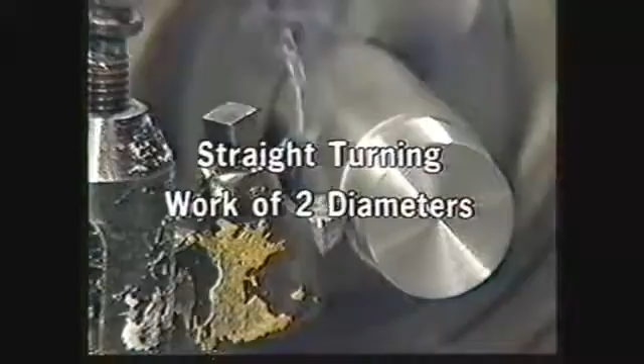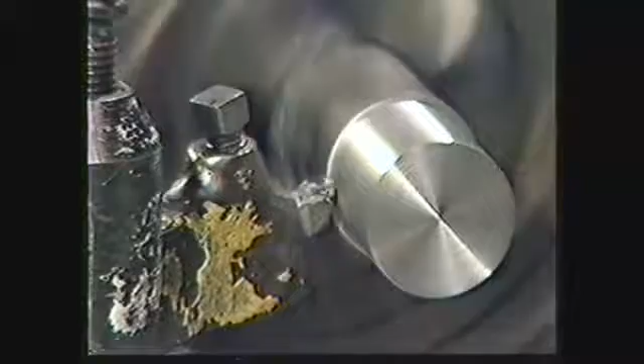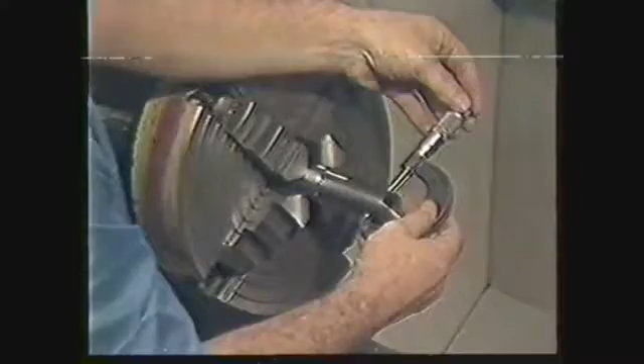This videotape will show you a proper method for turning work of 2 diameters in an independent 4-jaw lathe chuck. This is a completed workpiece turned to 2 diameters. Turning work is a basic skill that you will have to learn because every job done in a lathe must be turned to a given diameter. To complete this task, you will rough and finish turn 2 diameters on one workpiece.

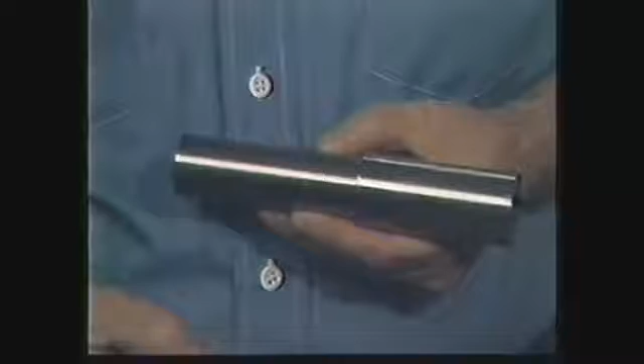Let's review the safety procedure for the engine lathe. You must wear safety glasses. Remove rings, watches, and jewelry. Roll your sleeves up to your elbows. Your clothing should fit tightly enough to prevent it from catching in the machine.

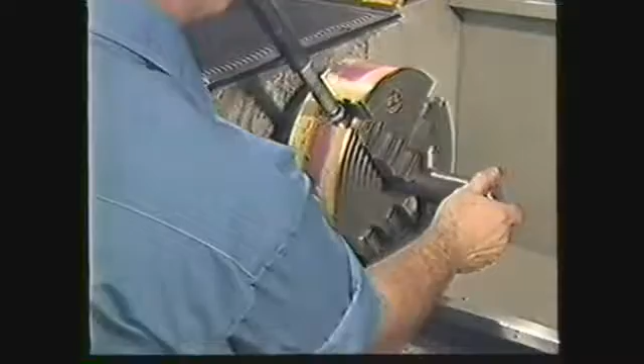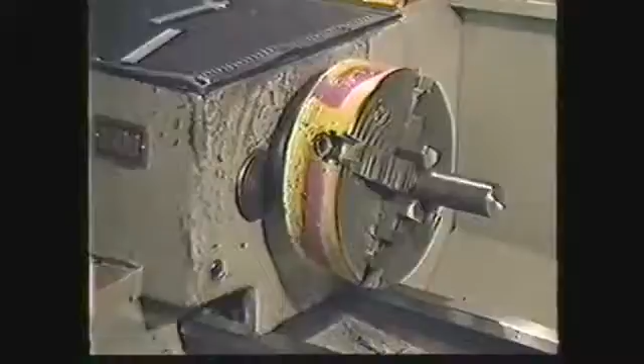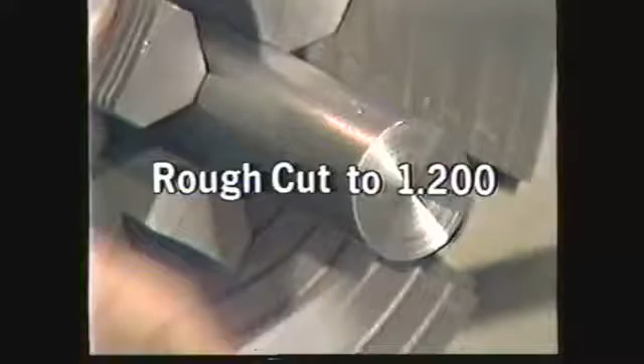Place a 6 or 7-inch piece of faced work in an independent 4-jaw chuck. Leave about 3 3/4 inches sticking out of the chuck. This workpiece is 1.5 inches in diameter. We want a finished diameter of 1.150 inches. So we will rough cut to 1.200 inches. This will leave 50 thousandths of an inch for the finish cut.

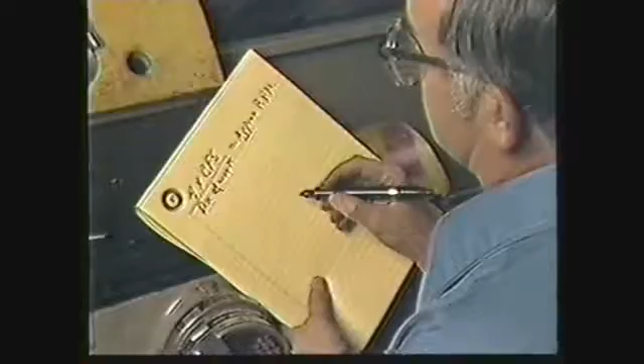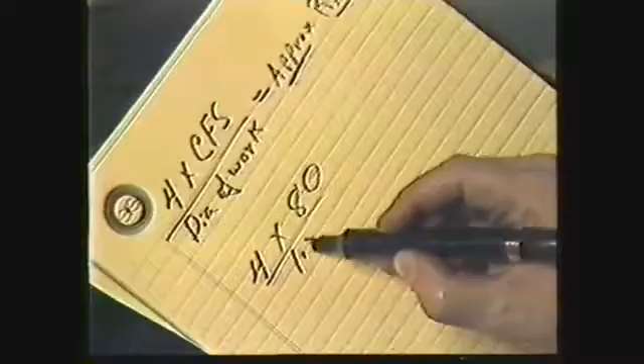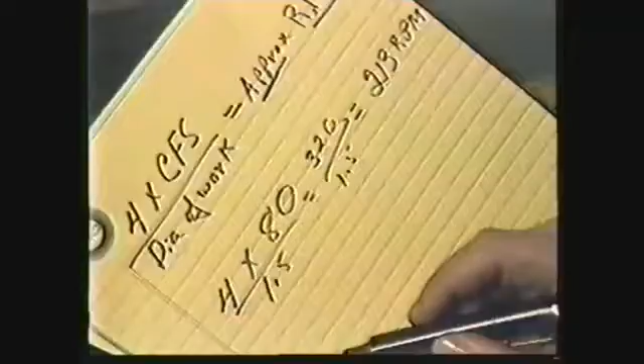Calculate the RPMs. The cutting foot speed for low carbon steel is 80. 4 times 80 divided by the diameter 1.5 inches equals the approximate RPM 213. Now determine the feed rate. Remember, the feed rate for roughing is usually 1/10 of the depth of cut. In this case, our first depth of cut is 100 thousandths of an inch, so our feed rate is 0.01.

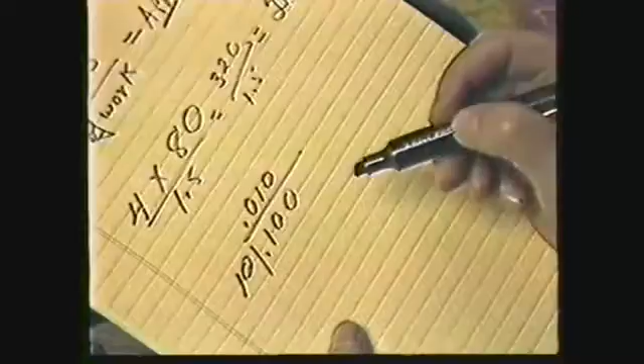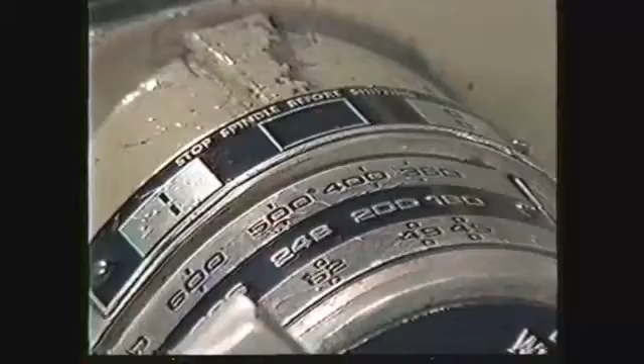Start the machine with it running in the forward position. Set the RPM as close to our calculated RPM of 213 as possible. The RPM is set about 1/3 of the distance between 200 and 248. Set the feed rate at 0.01. Engage the clutch.

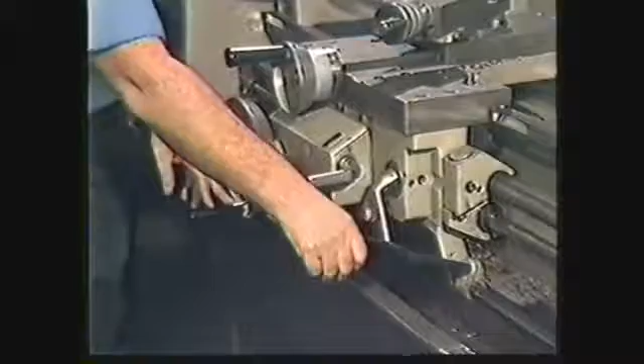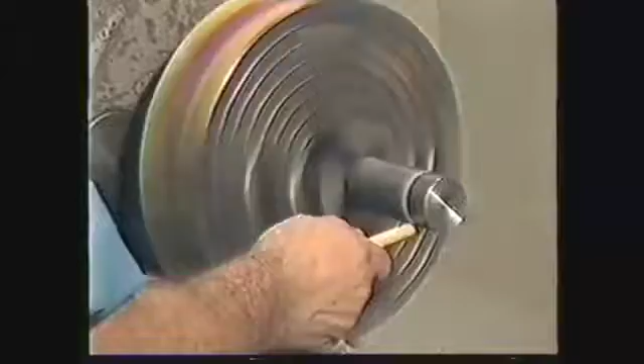Determine the direction of the carriage. Note that the carriage must be moving toward the headstock. Change the carriage direction lever if necessary. Now, shut off the carriage. Align the workpiece in the chuck using the chalk method. You are now ready to make the roughing cuts. Adjust the compound to 30 degrees off the perpendicular.

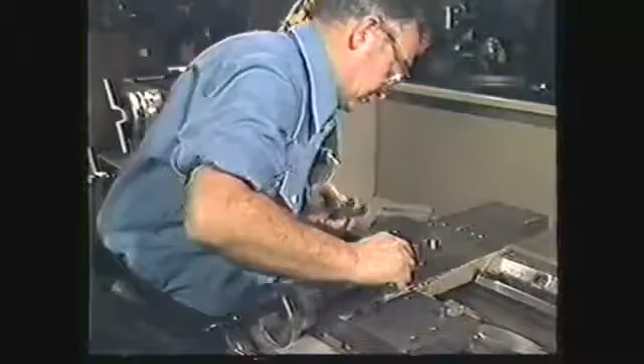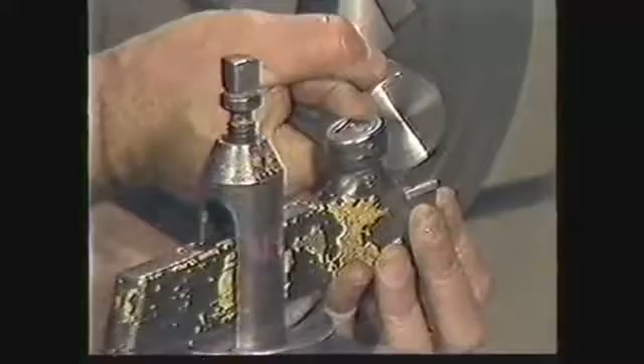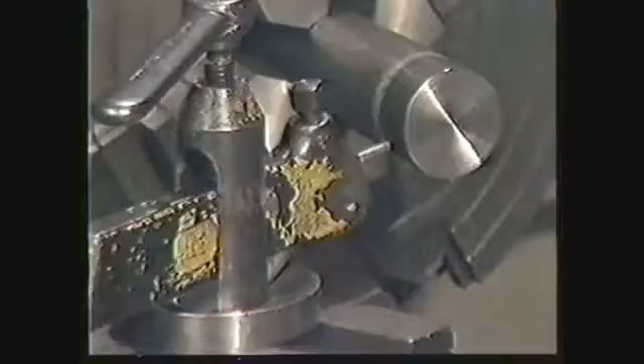Assemble the tool post. Put the left-hand tool holder in the tool post. Tighten the tool post to hold the tool holder. Put the right-hand roughing tool in the tool holder. Leave about 3/8 to 1/2 inch of the tool sticking out of the holder. Tighten the tool bit in the tool holder. Now, loosen the tool holder. Position the tool slightly above center height. Now tighten the tool post.

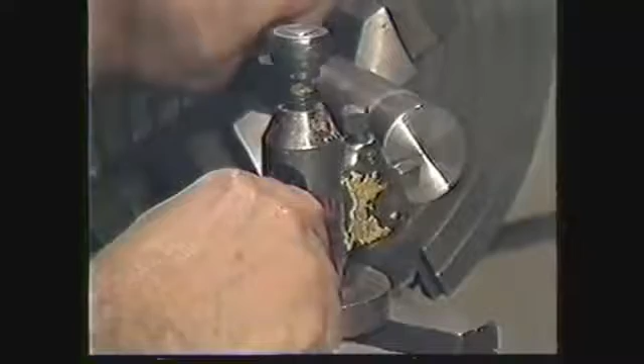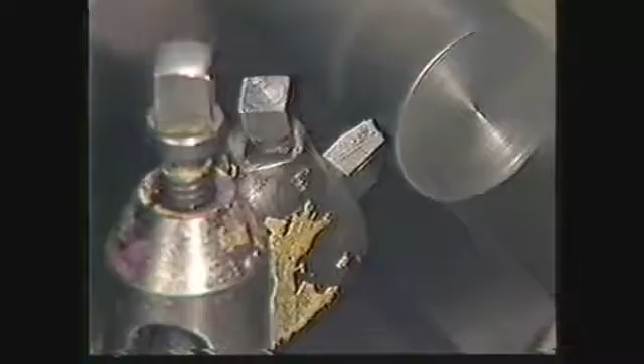Use the cross feed and carriage to position the tool just on the end of the work diameter. Do not touch the tool bit to the work. Leave approximately 1/8 inch between the tool bit and the work. Engage the clutch. Use the cross feed to bring the tool bit up to touch the diameter of the work. Use the carriage to back the tool off the diameter toward the tailstock end. Set the cross feed dial to 0.

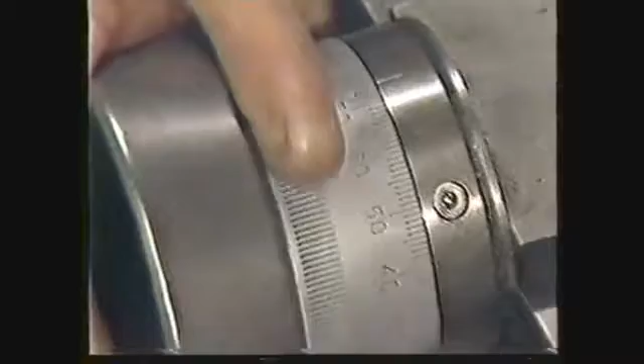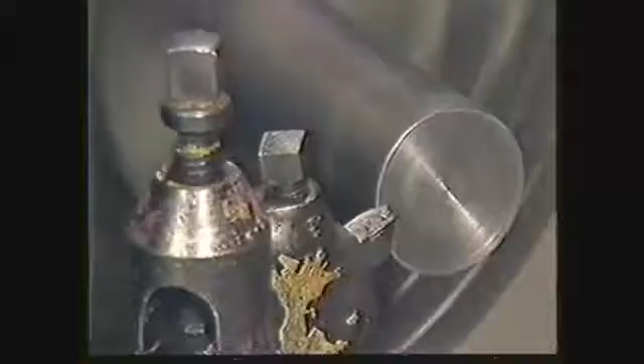Set the depth of cut to 100 thousandths of an inch. Remember, we will take 100 thousandths of an inch off this side and 100 thousandths of an inch off this side, removing a total of 200 thousandths of an inch off the diameter of the workpiece. Engage the longitudinal feed and begin the roughing cut. Rough cut the diameter to a length of 3½ inches. This process will take about 2 minutes. Periodically use the 6-inch scale to check the length of cut.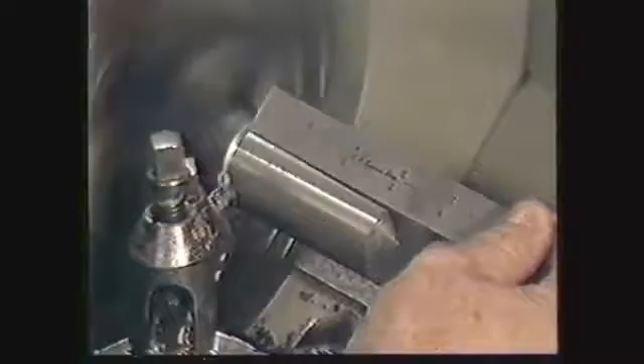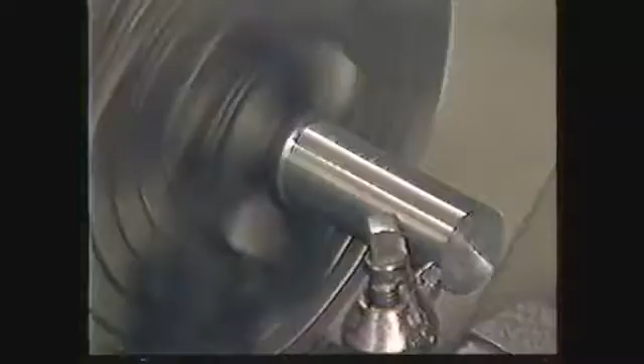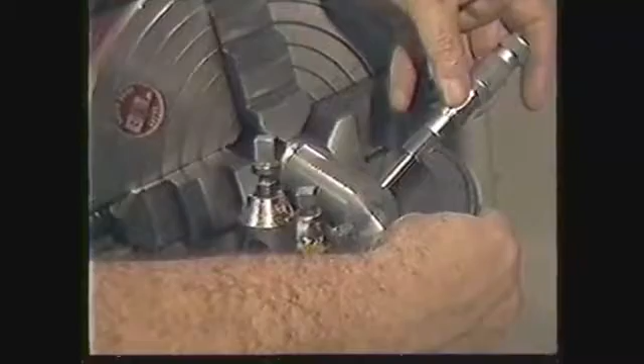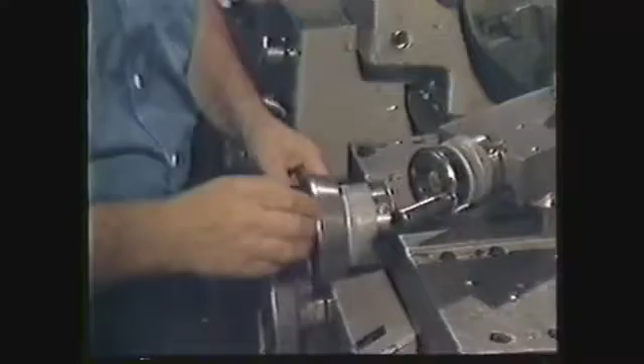After 3½ inches are cut, shut off the longitudinal feed. Back the tool bit off the diameter toward the tailstock by hand. Disengage the clutch. Measure the diameter using the 1-inch to 2-inch micrometer. Increase the depth of cut to remove enough material to reach the desired roughing diameter. Remember to leave 50 thousandths of an inch for the finishing cuts.

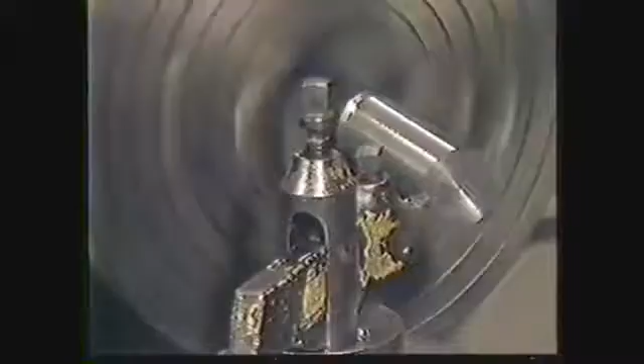Engage the clutch. Engage the longitudinal feed. Cut the second roughing cut. Stop the second roughing cut slightly short of the end of the first roughing cut. Complete the second roughing cut by hand. Disengage the clutch. Run the carriage by hand to bring the carriage to the end of the work.

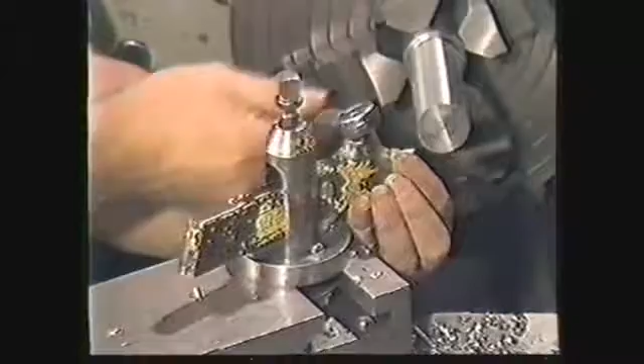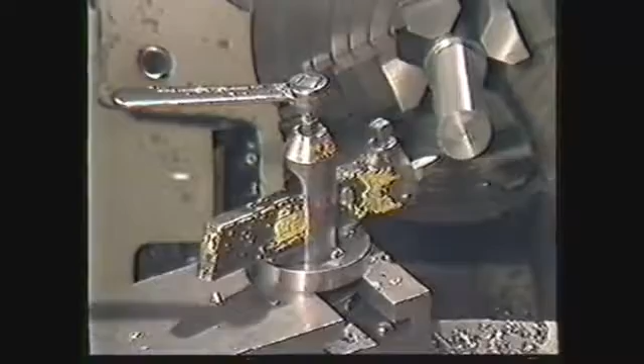You are now ready to make the finishing cuts. Remove the roughing tool. Insert the right-hand finishing tool. Tighten the tool in the tool holder. Set the tool to slightly above center height. Tighten the tool post. Position the tool over the end of the work.

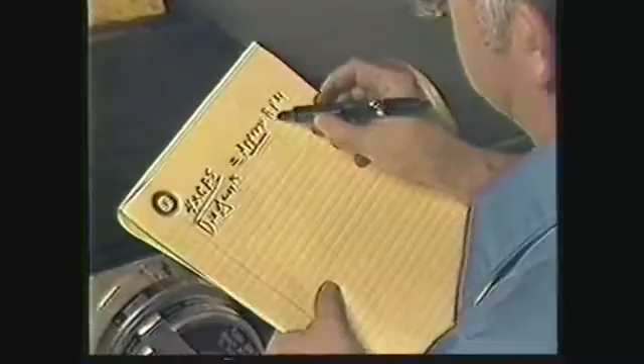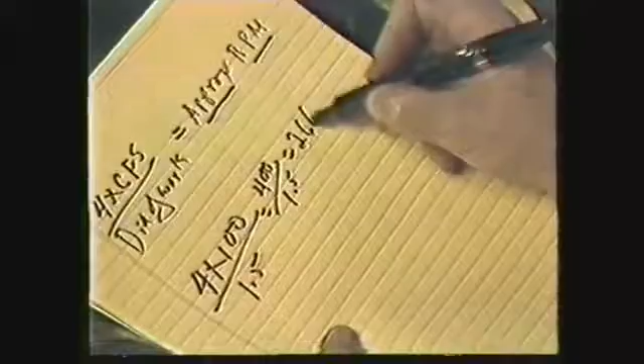Recalculate the RPM for finishing. 4 times the cutting foot speed of 100 divided by the diameter of work, 1.5 inches, equals 266 RPMs. Reset the RPM to 266. Reset a finishing feed rate of 0.0055. Engage the clutch. Touch the end of the work. Set the cross-feed dial to 0. Set the cross-feed dial to remove 30 thousandths of an inch off the diameter.

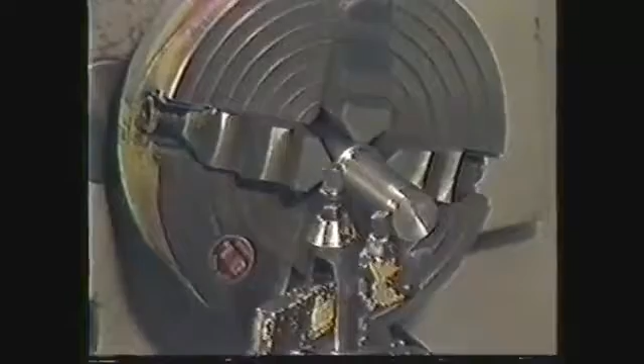Engage the longitudinal feed. Let the feed run for approximately 1/2 inch of length. Disengage the longitudinal feed. Disengage the clutch. Move the tool bit back off the end of the work. Measure the diameter using the 1-inch to 2-inch micrometer.

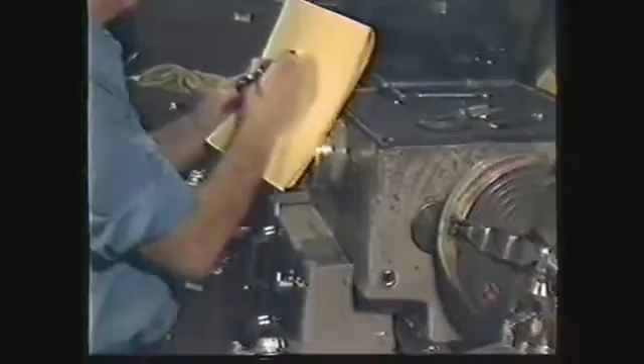Determine the amount to be removed for the finished diameter. In this case, we will remove 20 thousandths of an inch to reach a finished diameter of 1.150 inches. Move the cross-feed dial to remove enough metal to reach the desired finished diameter. Engage the clutch. Bring the tool bit close to the end of the work by hand. Engage the longitudinal feed. We will finish turning the workpiece to the finished diameter of 1.150 inches for a length of 3.50 inches.

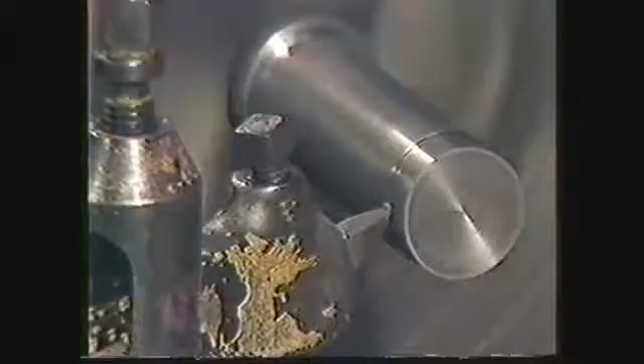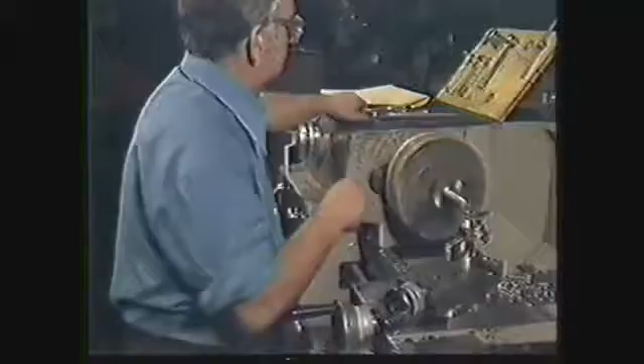Shut off the longitudinal feed when you are close to the first finished length. Finish by hand. Disengage the clutch. Back the tool bit away from the diameter of the work with the cross feed. Move the tool bit away from the work using the carriage. Remove the work from the chuck.

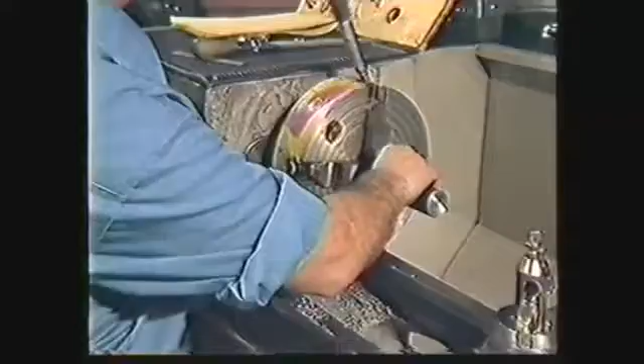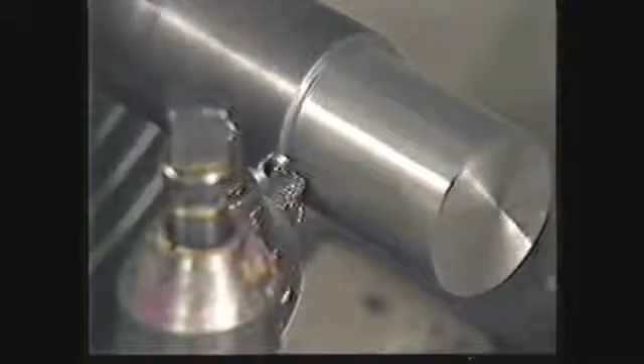Prepare to rough cut and finish the other side of your workpiece. Align your workpiece using the dial test indicator method. Rough cut and finish the other end of your workpiece following the identical procedure that you have just seen. Your completed work of 2 diameters should look exactly like this. Again, your instructor will provide you with the 2 finished diameters he or she wants you to finish your work to.